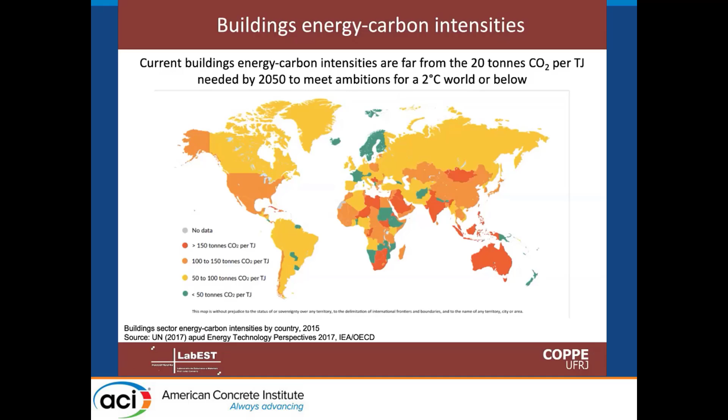And if we see here why this happened, it's because our buildings are not very efficient. If we look all around the world, of course in developed, industrialized regions like North America and part of Europe, we need heat in some of these countries, and we need cooling in other areas. The buildings are not designed properly to work without energy.

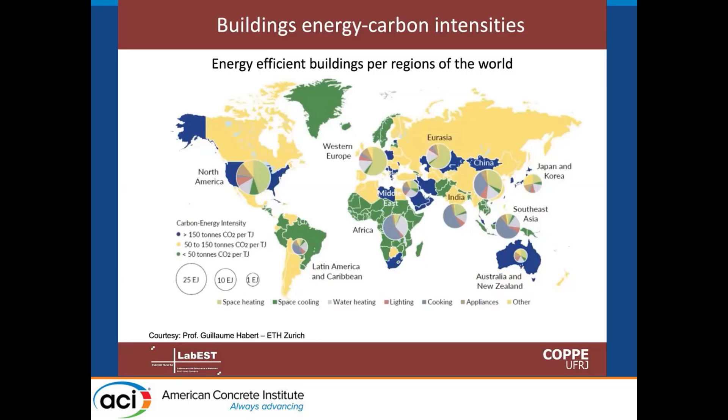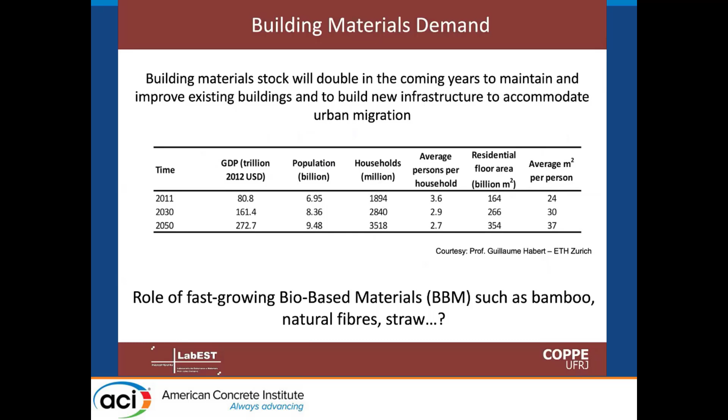And if we think that in the coming years until 2050 we still need lots of materials to accommodate the migration of populations to the cities, we expect nearly 3 times more people living in cities in the coming years. I think we should think about natural materials as alternatives for construction. So I would like to show you this afternoon why these materials are not only good materials, but also have conditions to reduce the intensity of CO2 and be more thermally efficient.

So I would like to say that nowadays we need to think about designing with circular economy in mind. We also need to think about design for disassembling. We need to use building information modeling together with life cycle assessment in order to achieve these goals. It's very challenging, what we need to do for new infrastructure, but also to retrofit the existing one in order to achieve our objectives.

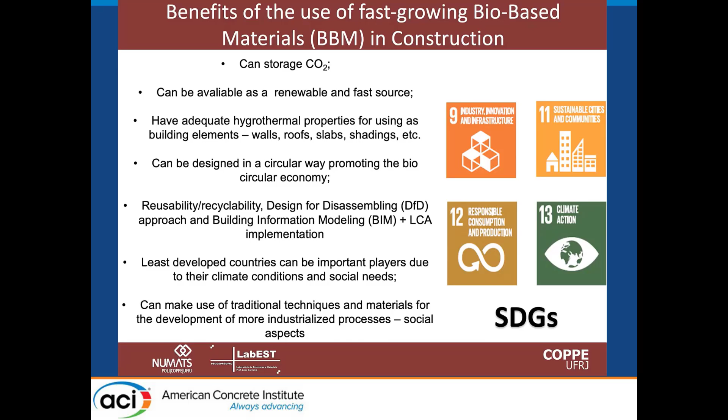I would like to show you here a division based on the volume of natural vegetable fiber that we put in the composites. I could classify this into 4 levels. When we use the fibers as normal reinforcement or textile, we normally have less than 10% in volume in the composition of the materials. But we can go up to nearly 95% when we have pole bamboo or industrialized bamboo as the main constituent. In this case we can have up to 95% biomass, and this is very important because the biogenic carbon can play a big role, and we can even be negative in emissions if we use this material. In between, we have systems with between 25 and 70% biomass, replacing natural aggregate with vegetable aggregates to produce thermally efficient materials.

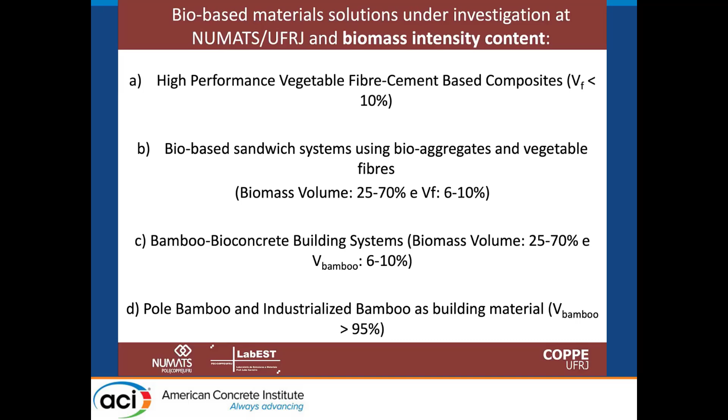Let me show you some of these applications and developments that we are running here in Brazil. Let me start with natural fiber. I selected here 3 types: curaua fiber, an Amazonic fiber, curaua and jute, but also sisal fiber, which is quite common in the northeast of Brazil, but also in Africa and many other parts of the world.

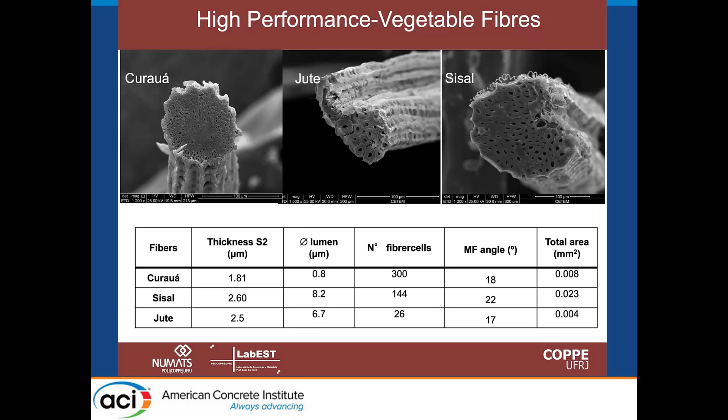These are very high performance fibers. They can resist up to 500 MPa, and have an elastic modulus that can range between 20 and 40, somehow in the same range as many synthetic fibers, or even higher. The jute fiber, for example, can have an elastic modulus similar to PVA fibers, and the other natural fibers have higher properties than polypropylene, nylon, and other synthetic fibers.

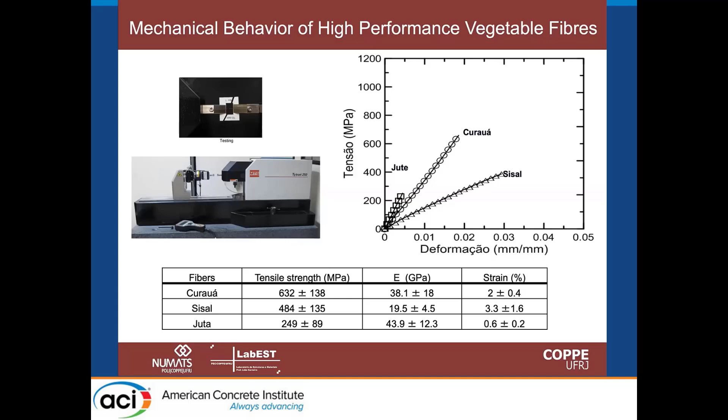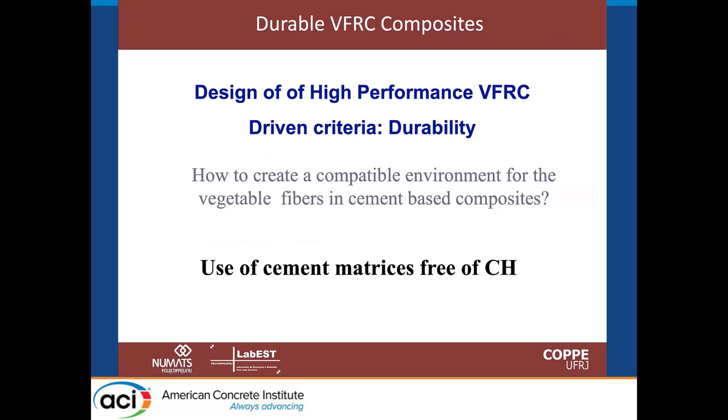These fibers need to be designed properly. We need to think about durability, and one big issue is the use of CH-free matrices. The matrix must be free of calcium hydroxide. To do that, we normally use pozzolanic materials like metakaolin, husk ash, or silica fume. The important thing in the design is that the CH-free matrix does not have calcium hydroxide in the composition, as it can mineralize the fibers.

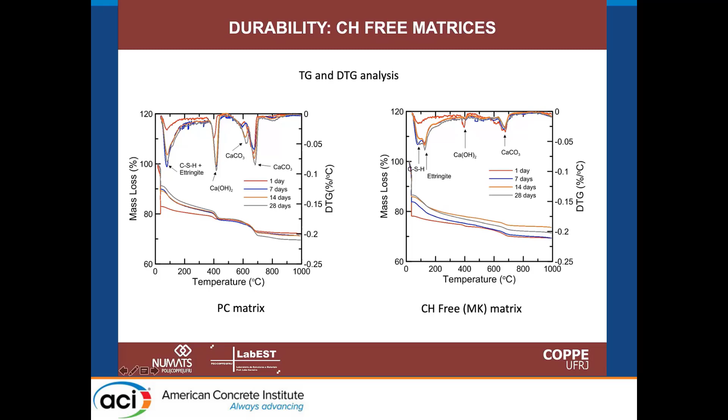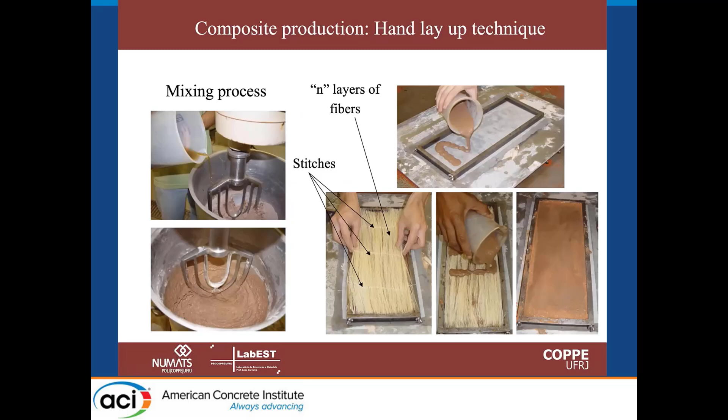Just to show you the potential of these materials, I'm presenting here long aligned fibers, built in layers. When we test them in bending, we can see a bendable concrete made with long aligned fibers. In this case, we have 6 layers, and we can achieve 25 MPa of equivalent bending strength.

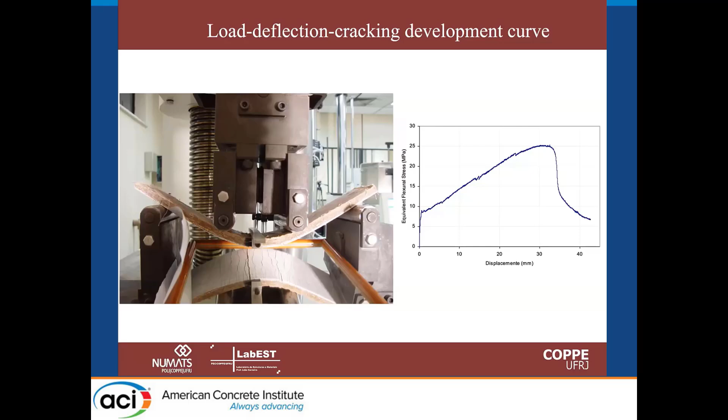But when we have short fibers, we can also have nice behavior, not at this level of deflection, but we can have 10, 15 millimeters deflection with 7, 8, or even 10 MPa under bending with short fibers as well. A big concern is the durability of these materials.

We did some cycles of wetting and drying. This is a good way to see how this material behaves under changing humidity and temperature.

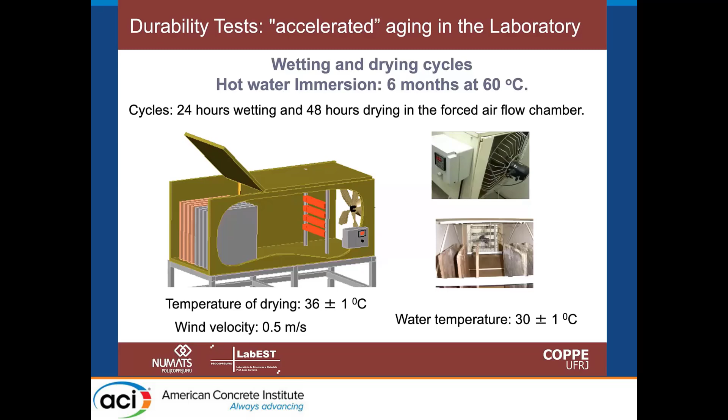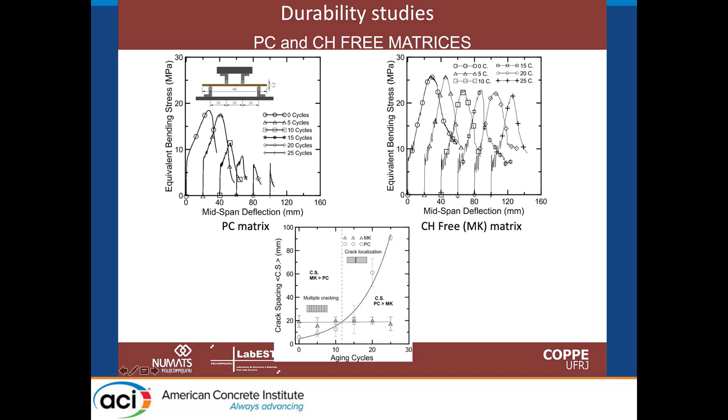We see here the necessity to use CH-free matrices. You see in the picture on the left, if we do not replace cement by pozzolanic material to completely consume calcium hydroxide, after few cycles, even after 10 cycles, we can already see a decrease in the post-cracking behavior. On the other hand, when we do use the CH-free matrix, we keep very much the same performance over time. So you see here what happens in the Portland cement matrix with vegetable fibers.

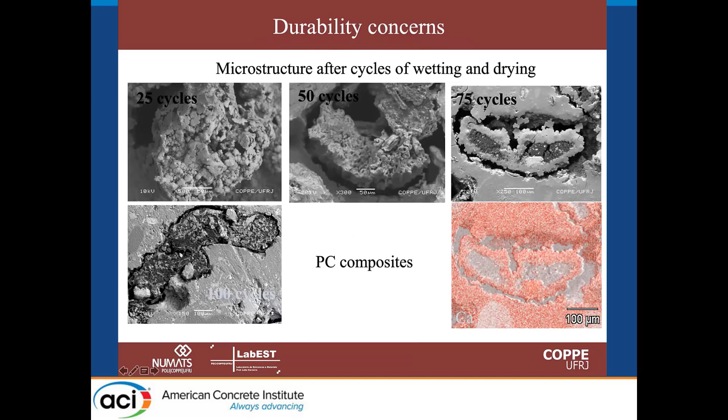Calcium hydroxide migrates to the microstructure of these fibers, which are porous, and we get mineralization. That's why we need to use metakaolin, so we can keep the fibers and the integrity of the fiber, as we can see in this microstructure picture.

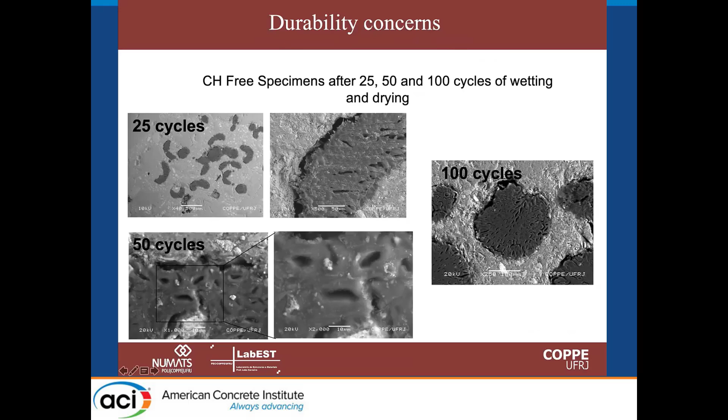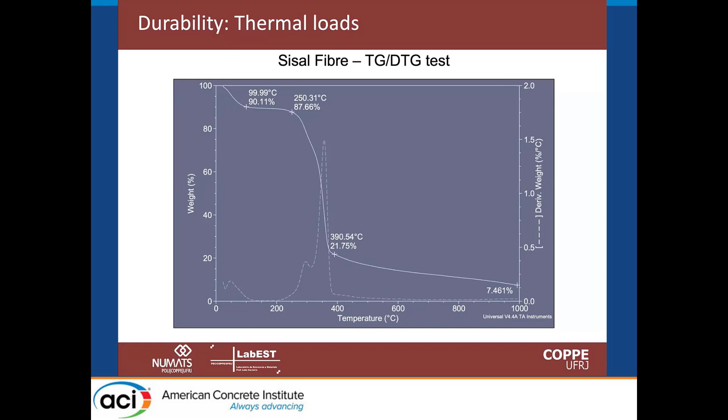Another important question is related to temperature stability. Normally people ask how many degrees these natural materials can support. We see here that up to 200, 250 degrees Celsius, up to that point we do not lose much mass of the material, so it's quite stable up to this temperature. Then we have a strong decrease in mass because we start the degradation of the chemical components of the natural fibers. We see here when we test composites submitted to temperatures up to 250 C...

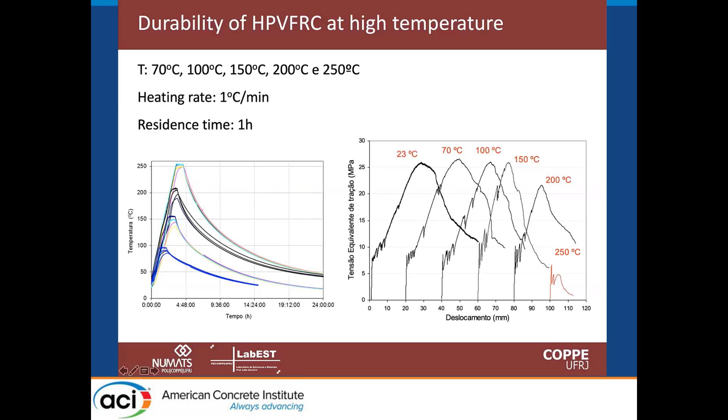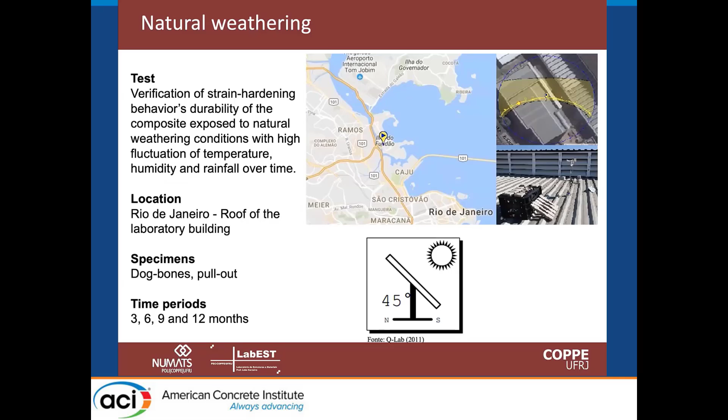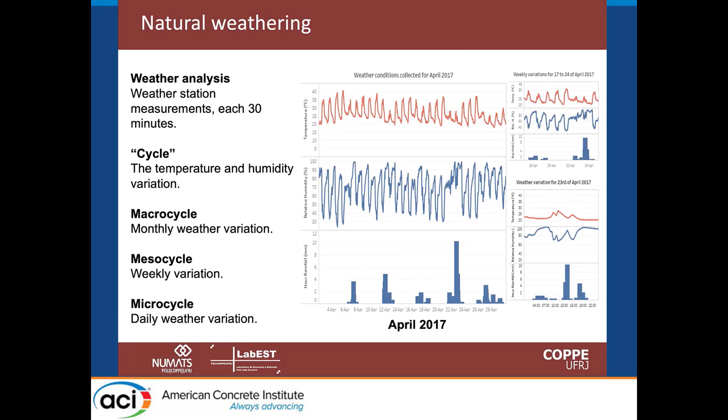One important thing is to see how, in tropical countries, the natural weather with thermal-hydro cycles can affect the behavior of the material. In tropical areas we have very quick cycles of wetting and drying, because we have rain and immediately after a few minutes the sun comes out again. Then we have several microcycles that are short term—even in one day we can have many of these cycles. This can degrade the composite.

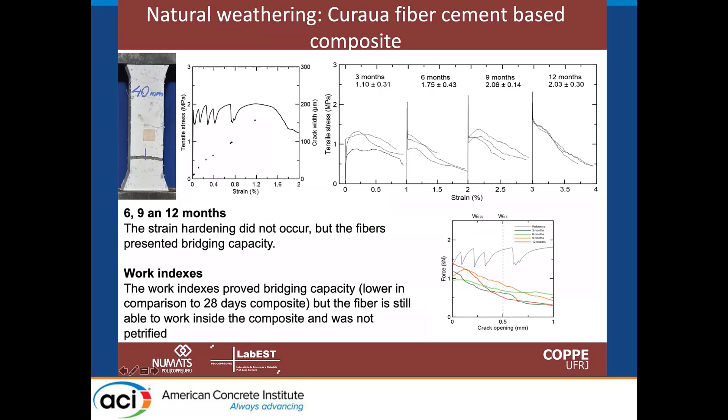Even if the fiber does not mineralize, that's not the problem, but we can have a kind of fibrillation, fiber defibrillation, and we can lose fiber capacity. But even so, the post-cracking behavior is quite maintained. Of course, to improve this performance and keep the original behavior, we need to use some sealant as well—materials like sealant or superficial coating, in order to guarantee longer-term performance.

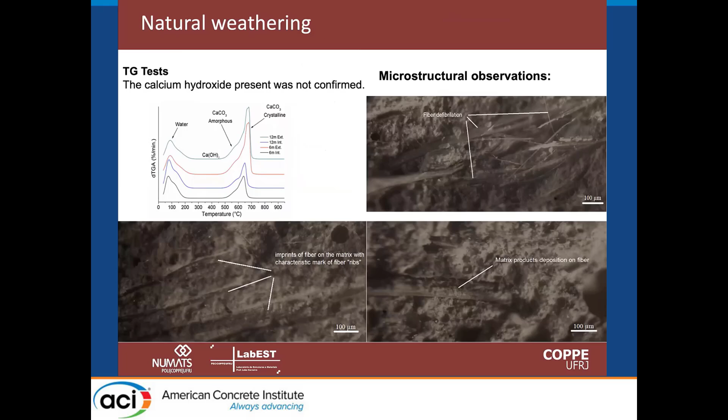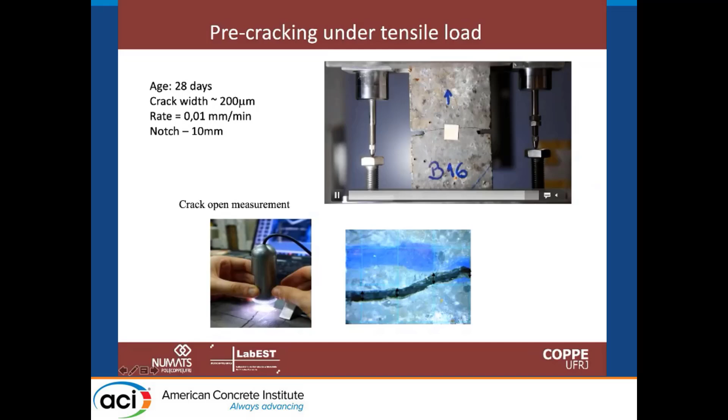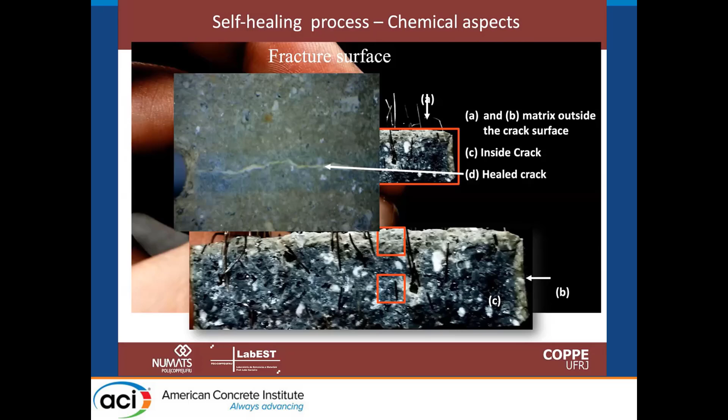This structural cellulose structure of these fibers can also help heal microcracks in concrete; this was done using ultra high performance fiber reinforced concrete. We induced a thin, controlled crack under tension, and later investigated the phenomenon of healing products growing in this crack. We see here that we could completely heal the crack due to the formation of CSH and other CSH products, and also calcite.

So if we promote this porosity, this inner porosity that the fibers can bring, it works by transporting water from one side of the crack to the other, and then deposition of unreacted materials can happen. This is quite the case in ultra high performance materials where we have a large amount of unhydrated cement, so we can close cracks.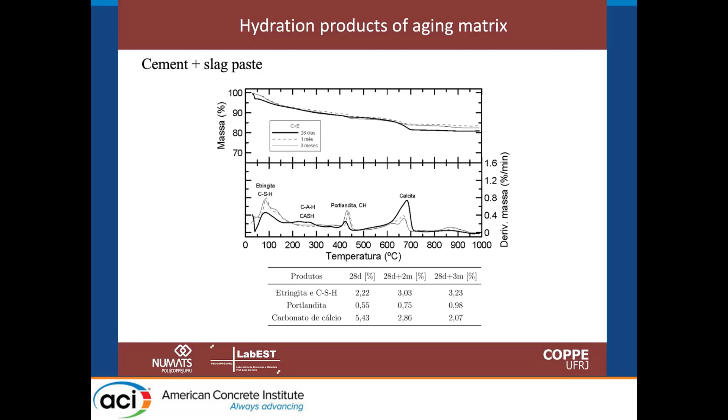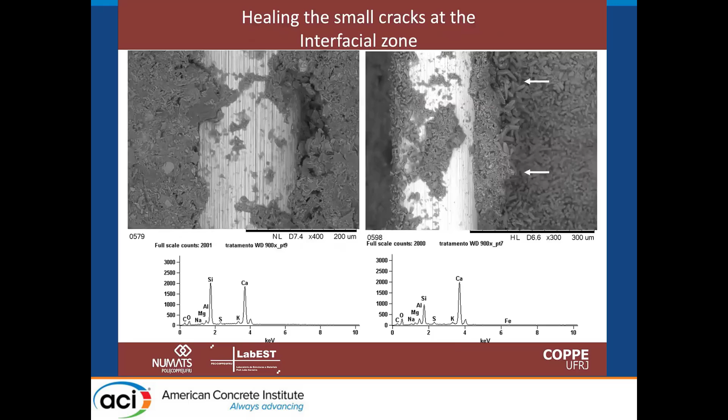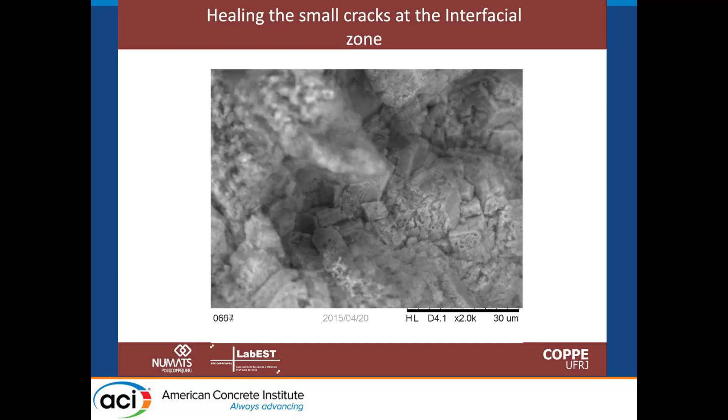We did some tests here to see the interface of these steel fibers with the material, where we have thin micro cracks. You see here that densification of the interfacial zone by these products completely healed the interface. We did pull-out tests after healing, and see here this response. In some cases, this is the non-cracked reference one; we can have responses that go above this behavior, or very much keep the same force for pull-out.

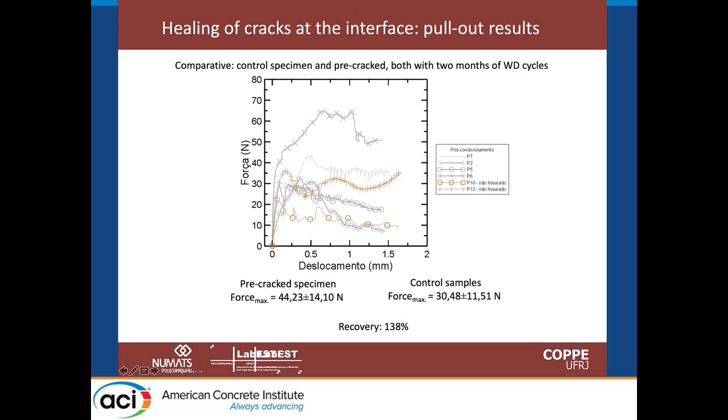After doing tests in healed and unhealed and uncracked materials, we see nearly the same response. This black material is a composite that healed. The other material in red wasn't cracked—it was only kept under normal cure.

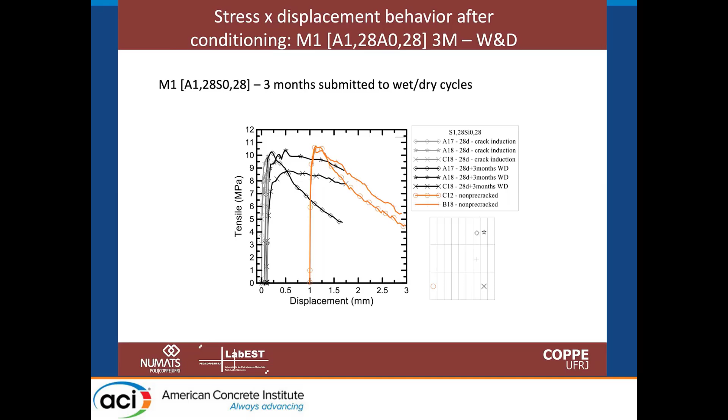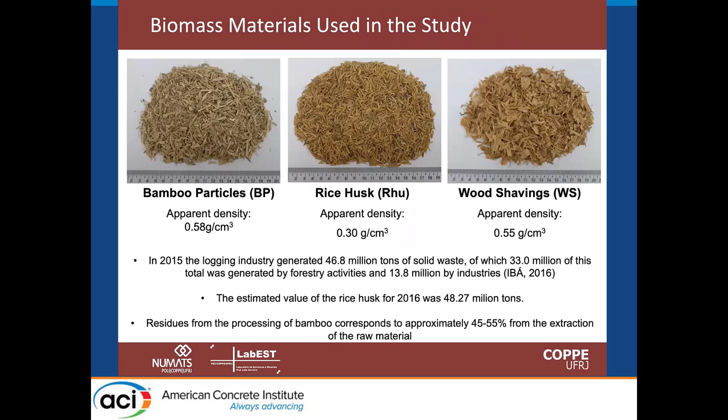The other system we are studying quite a bit is the use of wood shavings, rice husk, and bamboo particles as bioaggregate. One concern is the extractives that we need to remove, because they can affect hydration.

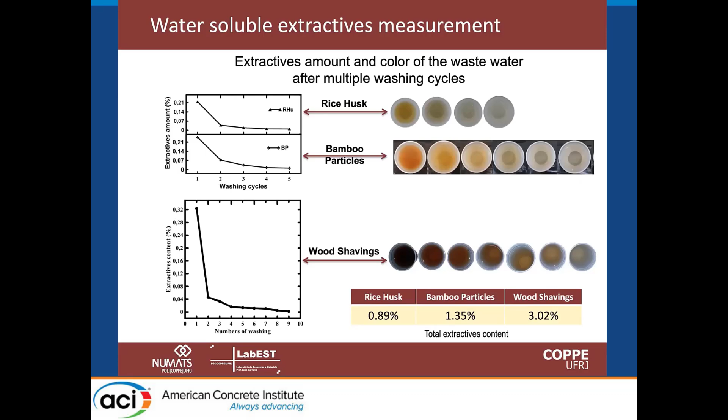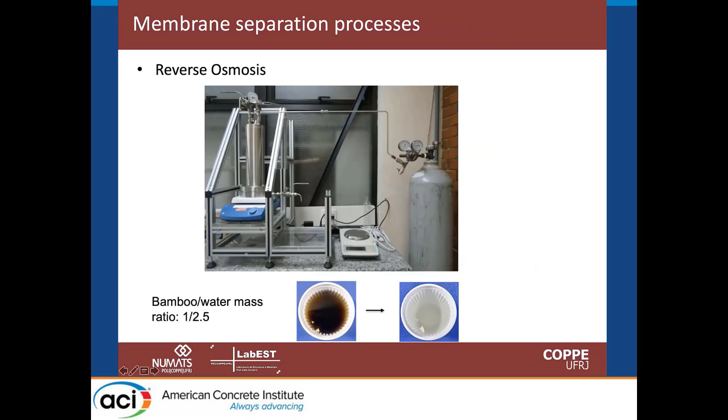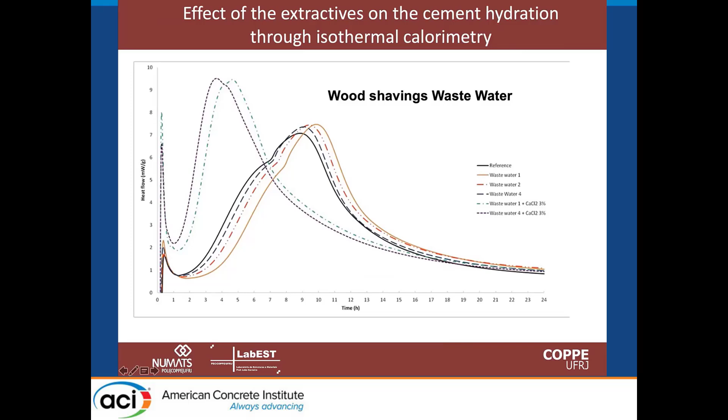This is just Portland cement. When we put the biomass without treatment, we retard it. But if we do osmosis treatment, in some cases we come back to the same heat of release and in the same rate as well.

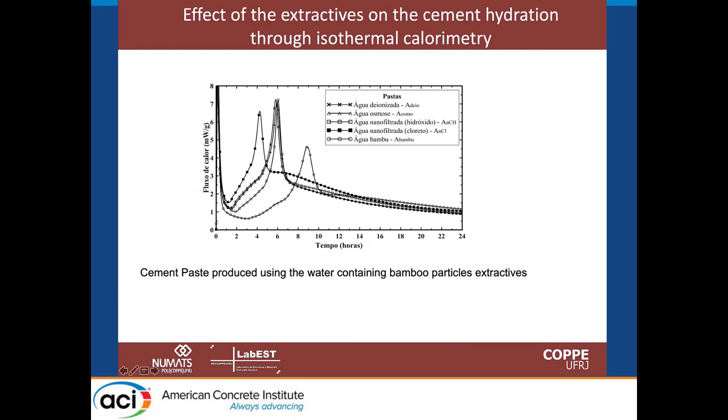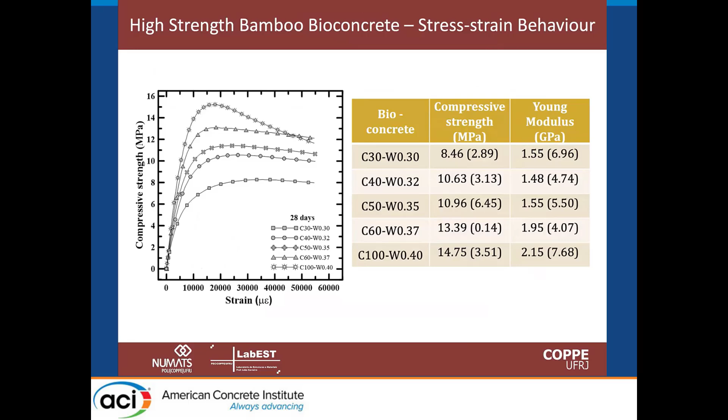So these materials have nice workability. They can have compressive strength in the range of 15 MPa and very low density—between 700 and 800 kilograms per cubic meter—with low thermal conductivity. So they can be used to improve the thermal efficiency of buildings.

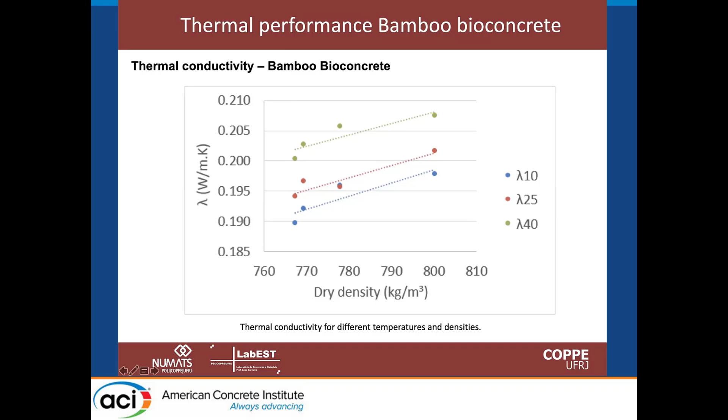If we need even lighter material, we can also aerate this bioconcrete, making it even lighter, and then reduce even more the thermal conductivity.

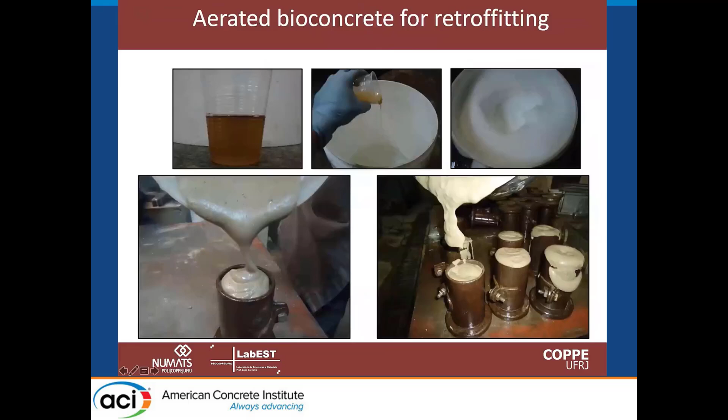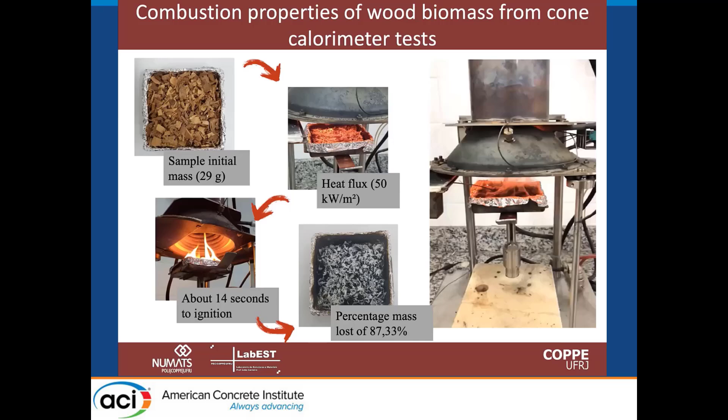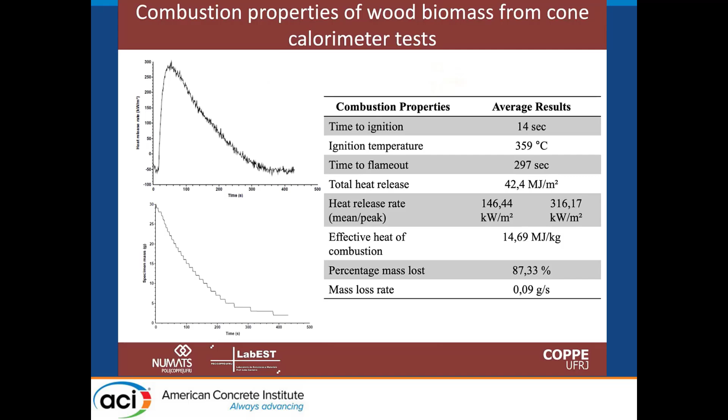We tested these materials for sensitivity to heat flux, using calorimeter tests to see the number of seconds the biomass ignites. But when we use up to 75% of this biomass in the cement matrix, the cement protects the material and no ignition was observed. Another important aspect is the biological durability of this material, because normally they have fungi.

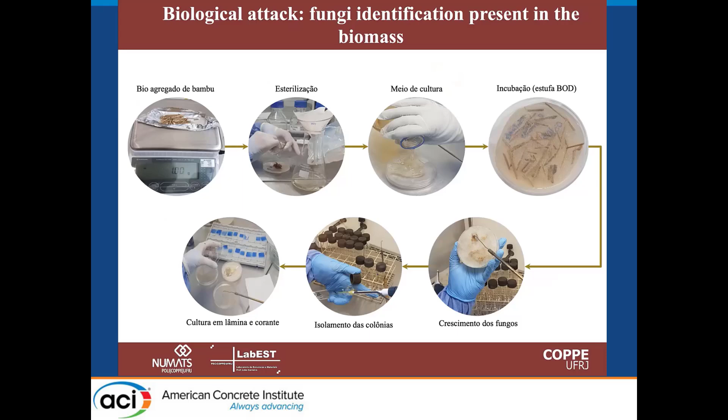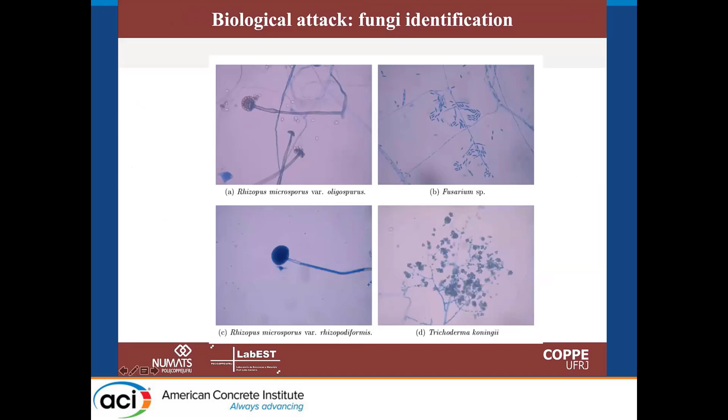We need to prevent fungal growth in the medium, so we identified for each biomass the kind of fungal that can be present. Later we did the inoculation of the bioconcrete with these materials.

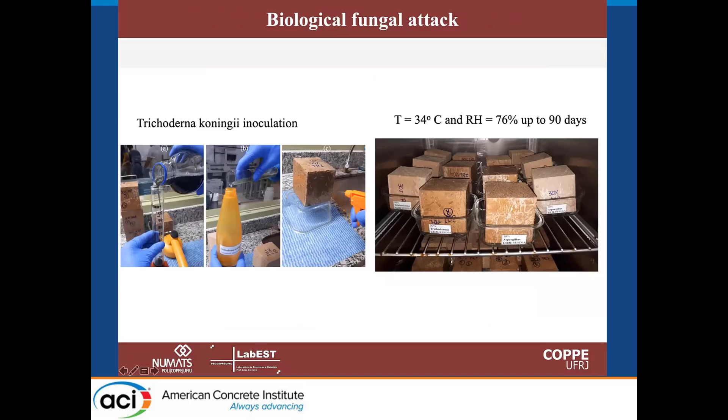We put this in a climatic chamber to simulate microclimate and see if fungi could grow on the surface of these materials. But as you see here, even up to 90 days, no signs of fungi were observed in mixtures that had 70% of biomass in the composition.

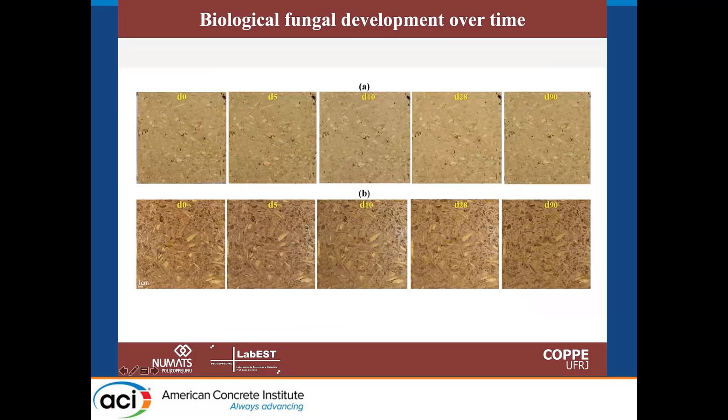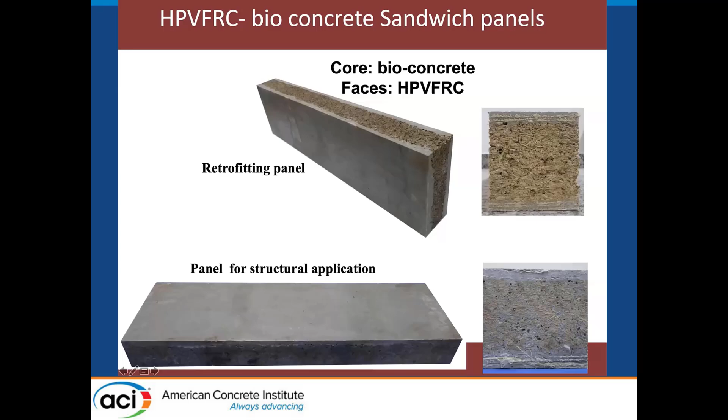Sandwich systems are already being tested using aligned fibers in the extremity composite. In the core, we are using lightweight bio-based concrete, and this material behaves very well. This is work I supervised together with Professor Joaquim Barros in a European project.

You see here very beautiful post-cracking behavior using this sandwich panel, and now we are starting to plan to develop structural systems.

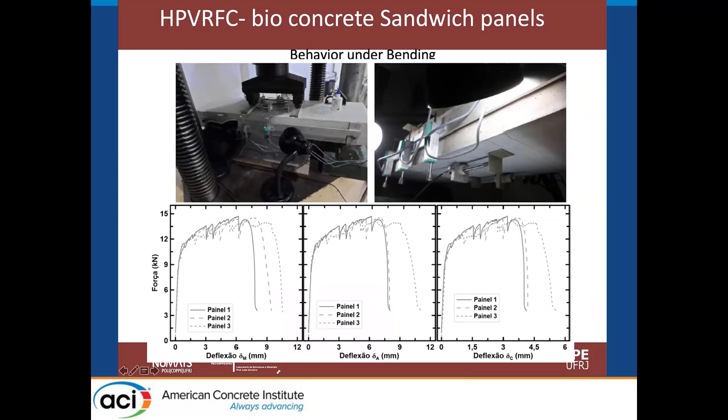In terms of bamboo, it's a functionally graded material. It has higher volume fraction close to the surface. So if we want to use this material as reinforcement, we should extract the strip close to the surface, because the volume fraction can be 55% there. If you come to the inner part, it's only around 40%.

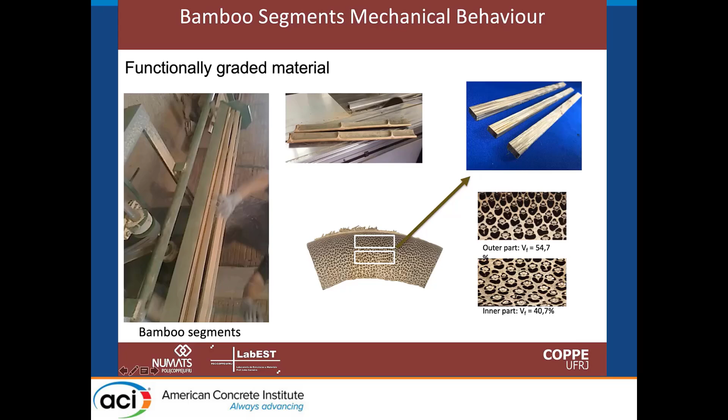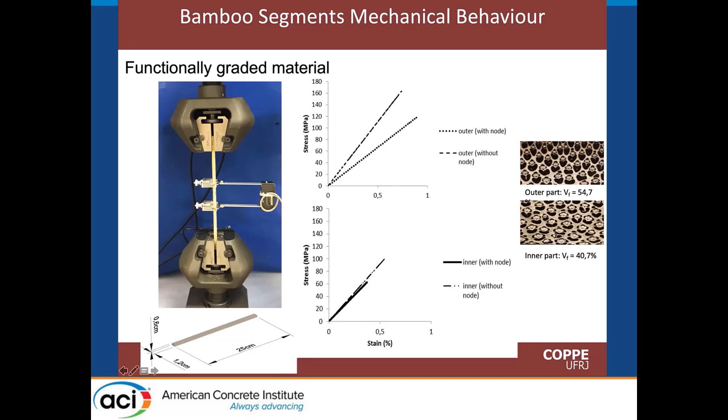This means you need to obtain strips taken from the right part. The elastic modulus and tensile strength of the strip, when taken from the outer part, can be much higher and much stiffer. The presence of nodes reduces the tensile strength, but doesn't change much the elastic modulus of the material. So we have to design taking this into account.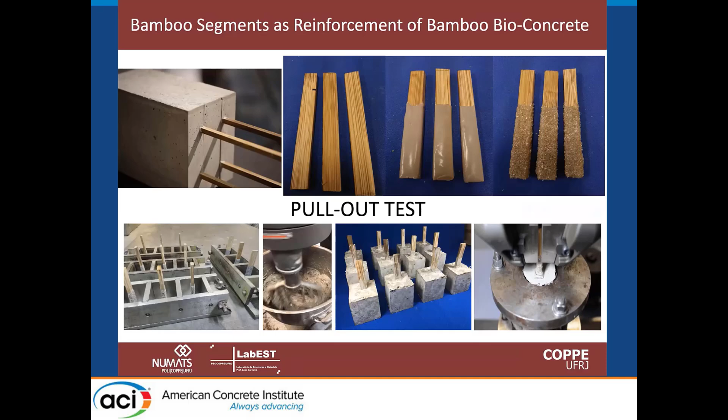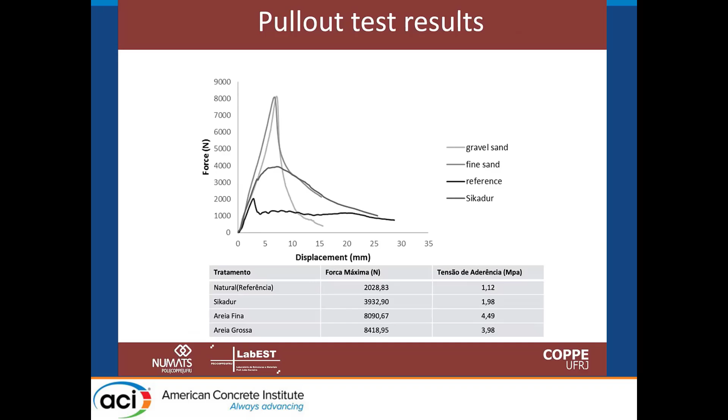So I'll use one minute to show you how these materials can work together with bioconcrete. These materials have 20 giga, and the bioconcrete too, so we can have very much the same system as steel and normal concrete. These materials can have a nice tension stiffening behavior.

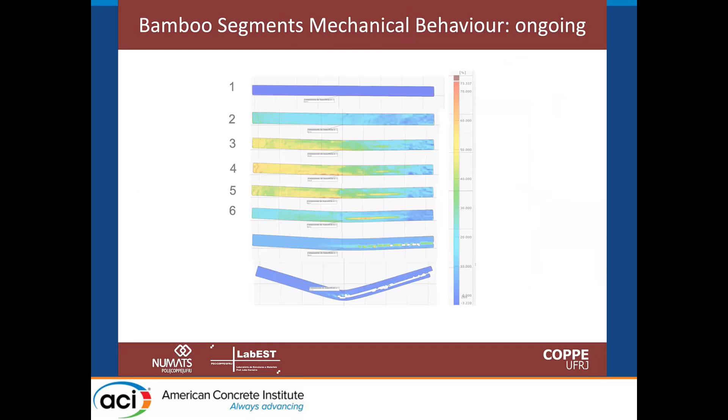Let me skip here some of these presentations about pole bamboo and come to the final two slides. You see here that the intensity of biomass is very important in order to reduce carbon emission, increase thermal efficiency, and of course we need now to guarantee durability to these systems.

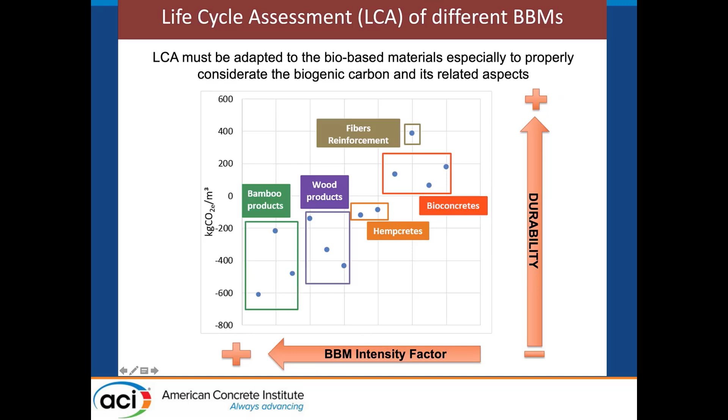So to conclude this presentation, I would like to say that the bio-based materials available all around the world can be nice materials as they are local and renewable. They can absorb and store CO2. They have the capacity to reduce thermal conductivity, so they can be used to mitigate and also adapt to climate change.

Of course, standardization and industrialization of these materials may be barriers that need to be focused on. It's very important to discuss this here at ACI, because we are already discussing this at RILEM as well at this moment. We need to design standards and design thinking about durability. Of course, assessing the emission potential of these materials is very important in order to guarantee that this material can reduce emissions and be efficient in terms of energy.